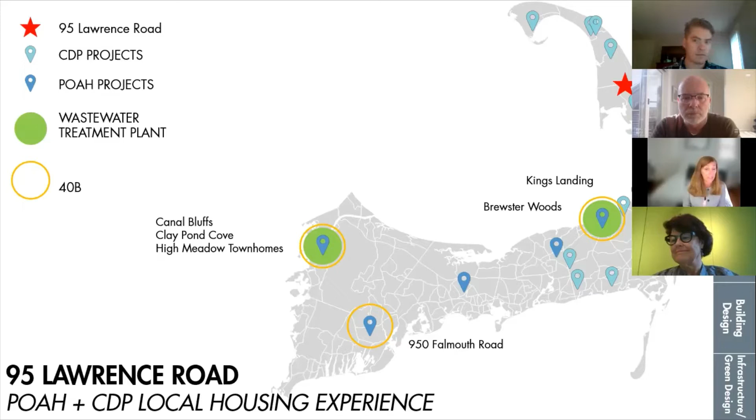POAH's experience with permitting multifamily housing through the comprehensive permit process, or 40B, is extensive. Two of our existing Cape Cod communities were permitted under 40B, and we secured our third 40B permit in March for development in Mashpee. CDP is our local partner for this project and will ensure our development work meets the needs and goals of the community. As our development partner, CDP will lead the permitting work, coordinate the lottery and lease-up process, and be an important part of the ownership entity. The POAH-CDP team has the experience, capacity, and commitment to successfully and sustainably bring critically needed year-round housing to the town of Wellfleet.

As Jay mentioned, this is a rare opportunity to build housing on the Lower Cape. Because of this, we wanted to provide housing to a broad range of residents. We have proposed a range of affordability consistent with the town's criteria included in their RFP, from 30 to 100% area median income. This addresses a range of needs, from lower wage households working in seasonal service jobs and retail, to middle income households in construction, entertainment, office administration, and town employees such as teachers, police officers, and firefighters.

Specifically, we have proposed 8 units reserved for households with very modest incomes in the range of 30% to 50% AMI, area median income — folks working minimum wage jobs or living on Social Security. 27 units will be restricted to households earning up to 60% of area median income, between $40,000 and $60,000 per year — seasonal service workers, single income households, and retirees living on savings.

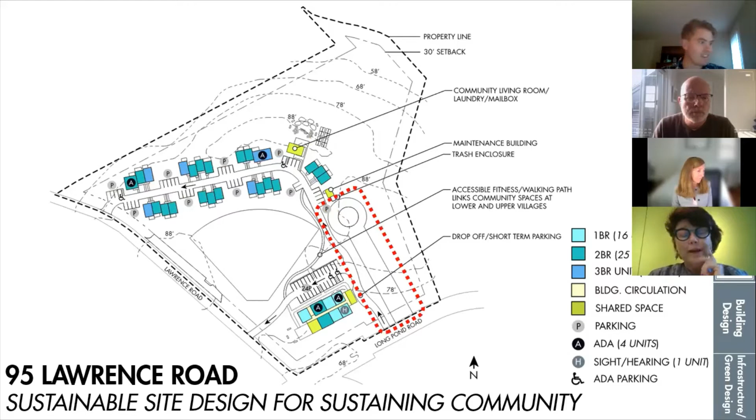And there, you can see that's okay. You can just keep going through them, Jason. Yeah, the parking. Oh, and we left the water tower and its easement alone. We thought that was really critical.

So one of the things that was important to us, and this is a factor of sustainability, is to really protect the existing woodland, Wellfleet landscape. It's a very specific vegetation. I can't do this justice, our landscape architect did a much better job in the interview presentation. But this was a very important element to us to protect what's there and then to add back native species so that it's really a restorative project.

Here's the landscape plan that shows that, the dark green, of course, existing woodlands. Where we've infilled the buffer zone, so everywhere we have a minimum of a 30-foot buffer zone around the housing, between the housing and Lawrence Road, between the housing and Long Pond Road, between the housing and the water tower easement, and a very substantial buffer, several acres, between Old Long Pond Road, down the hill, and the back of this site. We thought those were critical elements.

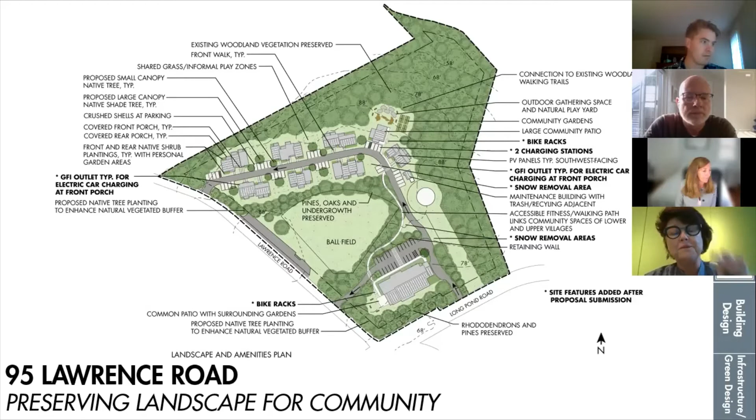Parking is dispersed, so it's perpendicular to the road, but it's in 3 groups of 3 or 4 parking spaces to make it really close to the townhouses. Let's go to the next.

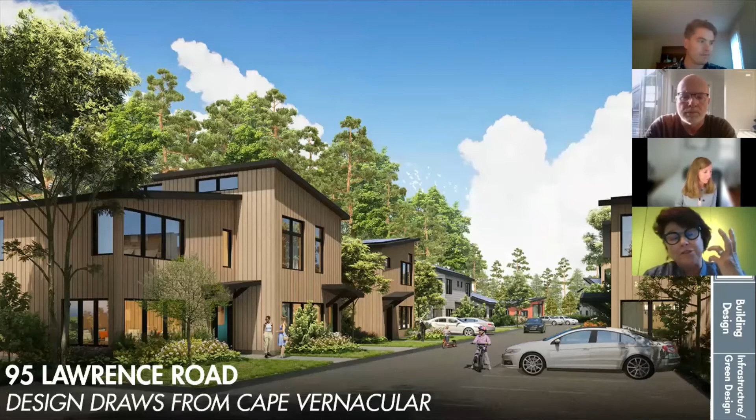So here you see a view, this is at the Upper Village from Lawrence Road. And we took a departure from what our competitors did here. We said, no, not only do we want to build on the Cape Cod vernacular, but we want to recognize and build upon the lessons learned from the mid-century, mid-20th century modern houses in Wellfleet. It's a legacy that Wellfleet should be very proud of. It's an incredible legacy.

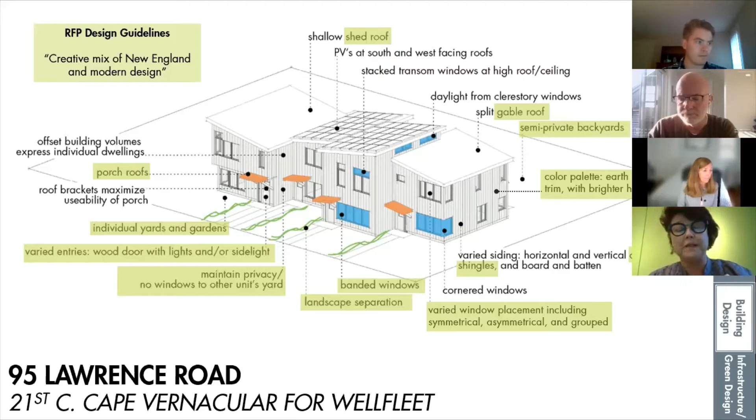We were also thinking about potentially a differently abled population, so older people, people who can age in place, and what kinds of needs they would have. We thought the best thing would be to have all their services under a single roof.

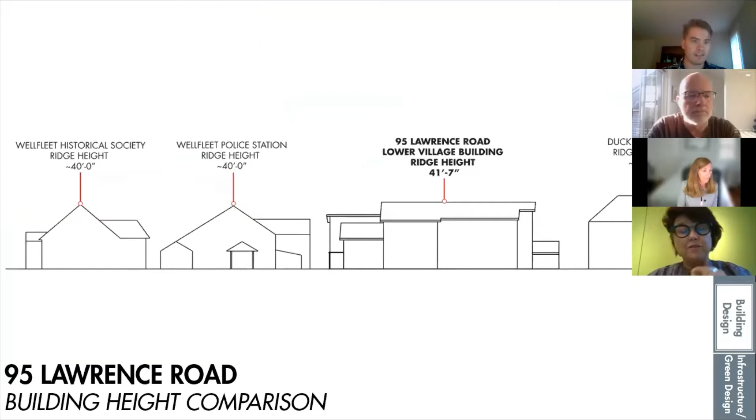Here we see again the precedents for some of the 3-story buildings in town. I did a little height comparison just to see how the height of what we propose fits in. We are lower, for instance, than the old Duck Creek Inn, higher than the police station close by the site.

Just like at the Upper Village, connecting to the landscape was really important to us here. One thing we did was set the front face of this building right behind the existing classroom building wall so we could maintain a very dense vegetated buffer that exists right now on Long Pond Road. There's pine and oak trees, some enormous rhododendrons filling in between them. You practically can't see that building.

What we'll do is infill whatever is missing, like where the cut is for the road, to come in at grade, but we wanted to maintain that strong buffer so this is a very subtle presence on Long Pond Road. Residents here have the joy of looking out to that dense landscape screen, but also get to use outdoor space.

This building has its own shared laundry, its own lobby with mailbox and package area, and a couple of offices for the property management staff that POAH will have here, so residents can connect readily with both program and property management staff. I want to mention a little about materiality here, because we get to develop it a bit more than in the upper village view I showed you.

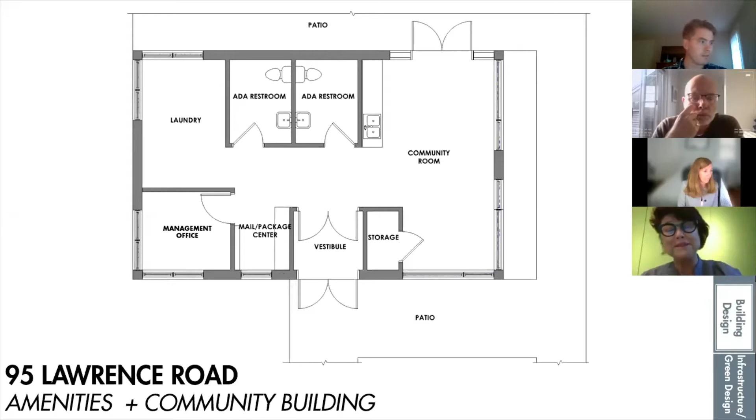I mentioned sustainability a couple of times, and we take it really seriously in our firm. So sustainability drove both a passive solar approach. We oriented each of these buildings within 15 degrees of due south in order to maximize the solar orientation of the facades and windows, north and south primarily. But we also oriented it to maximize the PVs.

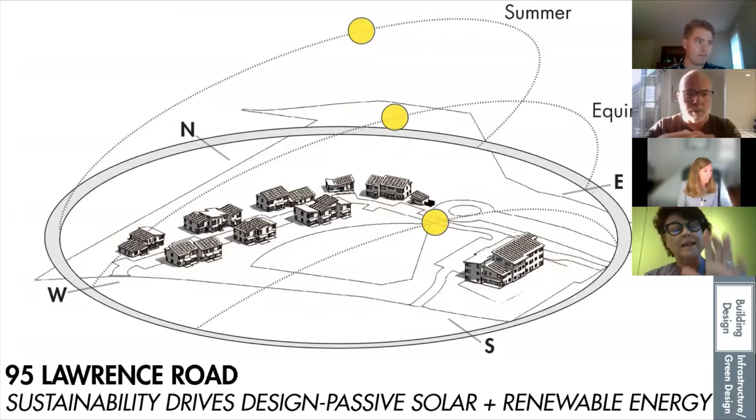Let's go to the next. This diagram shows the way we approach a multi-layered set of strategies for how to achieve a low energy, high performance building, getting as close to net zero energy as we can.

Jay mentioned the systems are all electric. There will be no gas on the site. The building envelope has to be very tight, and we are designing to passive house with the expectation of pursuing certification. That is the most energy efficient approach you can take today, which means there will be, in addition to operable windows, mechanical ventilation in every unit.

This is both the townhouses and this building, with an energy recovery ventilation system and solar electric panels on the roof, as I mentioned. So it's a multi-layered approach to maximize both the resilience of the project over the long term and the energy efficiency.

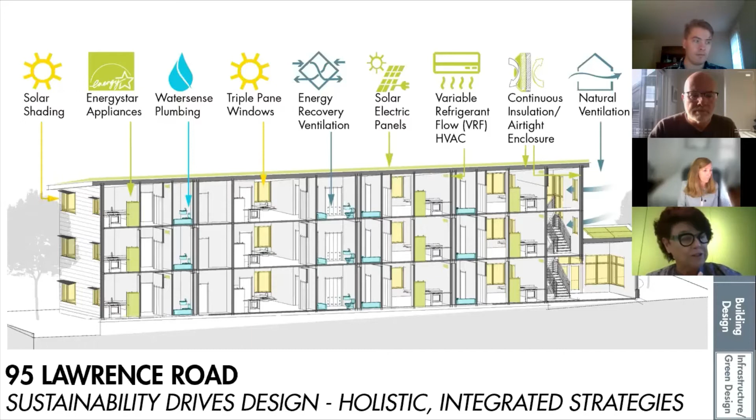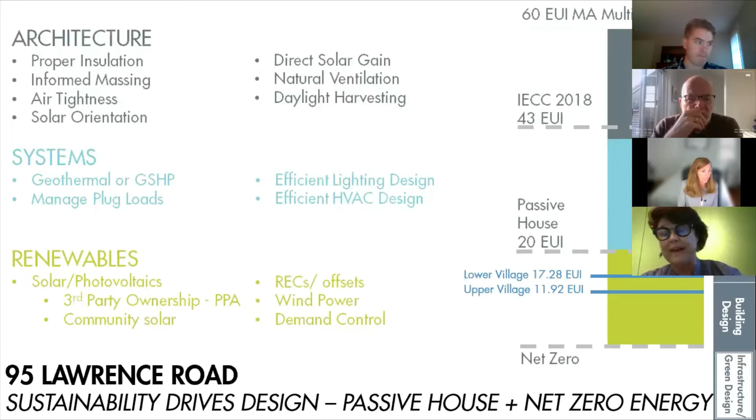Thank you, Gail. So I hope this presentation has helped you understand our proposal and our commitment to building high quality housing that is affordable, environmentally sustainable, resilient, and elegantly designed in a way that draws on local building traditions. While the town of Wellfleet will be choosing among 3 developers based on our responses to the RFP, it's important to know that our proposal is actually the beginning of a conversation with Wellfleet's officials and citizens on how to build a new neighborhood that addresses a broad range of community needs.

One of the benefits of the 40B process and the public hearings required is the opportunity they provide for us to work together to fine-tune our vision and perfect our proposal. Through this process, we can adapt and modify our plans so that we create a project that truly meets the town's bold and inspiring vision for a neighborhood that addresses the affordable housing crisis and leads to a more equitable and diverse year-round community. And with that, I'd be happy to entertain questions or hear your comments.